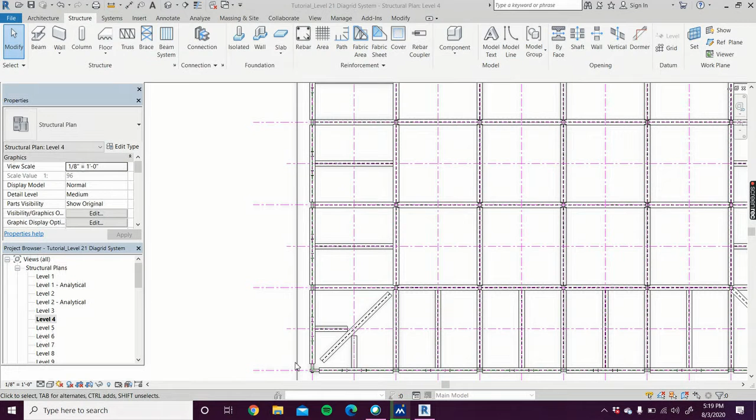We already have the pre-existing beams here like we did last time, so I'm just going to go ahead and start deleting all of these beams along the perimeter.

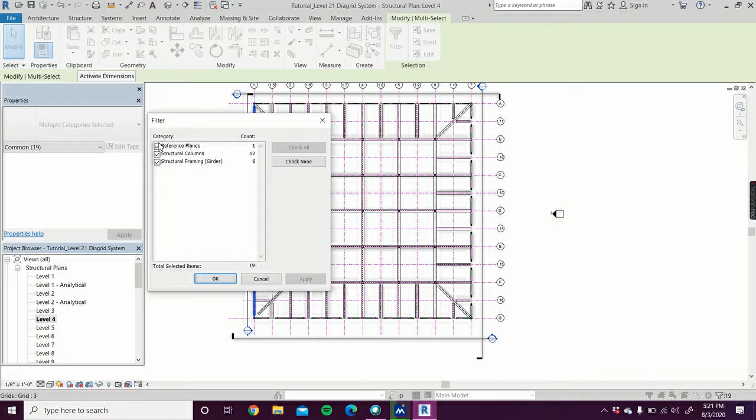Okay, they're all deleted. Now I'm going to start putting in the beams, 14 by 176, or whatever size you chose last time. We know that's going to be 2'6", and it's going to be 5 feet.

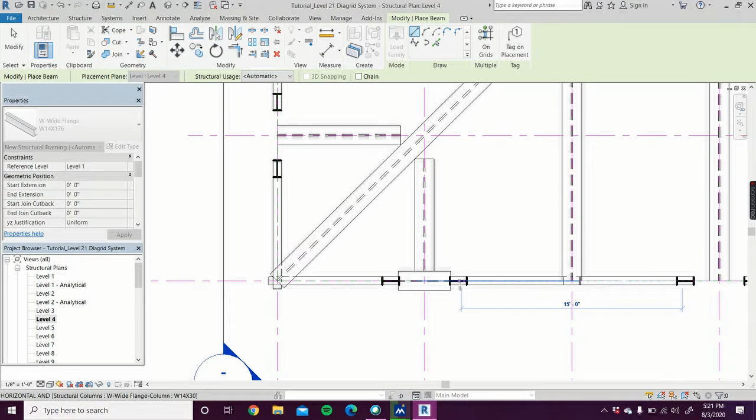That's going to be 15 feet. Shape that 2'6", 45 degrees.

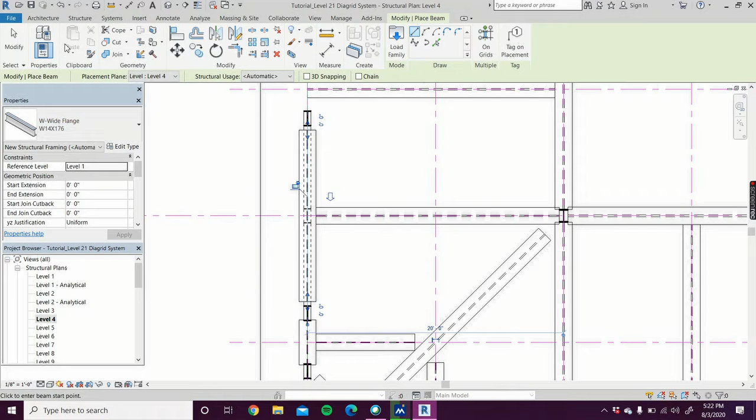Okay, and there we go, we have the first few done, so now what we can do is start making an array. While I'm at this corner, I'm just going to fix this beam.

Just to be clear, you may notice how these beams right here in the center don't connect yet. That's just because they're presentation for this floor plan. I don't really need to worry about that, but for you guys, you'll need to figure out how to make them triangularly connect to this middle beam right here, but again, that's up to the individual groups to figure out how to do. So I'll go ahead and start this array.

So tab, control, then the other beam, because I want to select them both in this array so I can do both beams at once.

I want to move it 20 feet. Let's see how 5 works. And yes, that looks good.

But now I just need to copy this beam over one more time for that edge. I'm just going to do copy because it's only one. Copy will work just the same way, you just don't have the repeat option. Choose anywhere, move it over 20 feet horizontally. There we go. Now we have that whole side done.

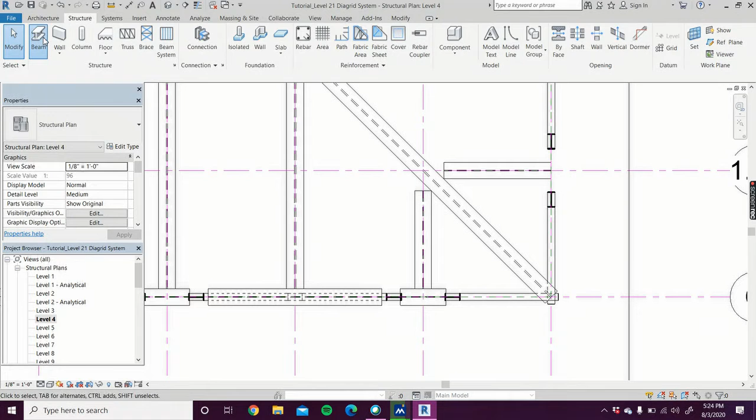I'll throw in this corner beam. Now let's fix the west side.

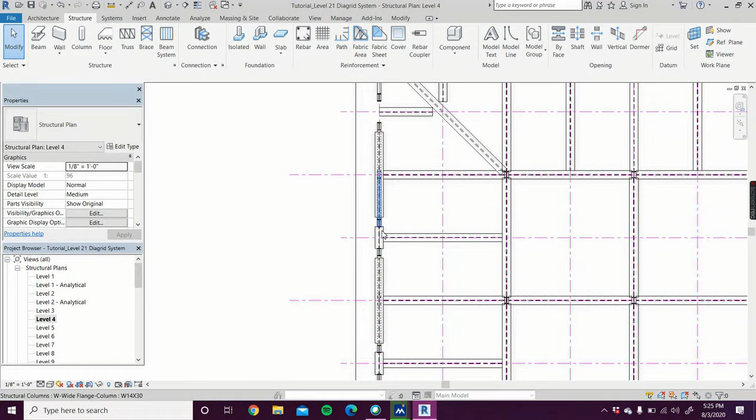Not sure if I remembered to mention these in the previous videos, but once you place all of these beams in each view, you should be ungrouping all of them. When you want to color the beams later on, they will all need to be ungrouped, and you're going to want to ungroup them now before you copy and paste.

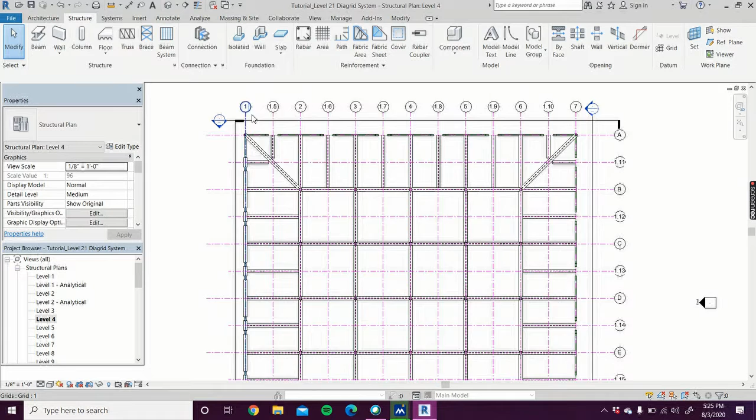Okay, I'm going to throw in this corner beam. Okay, and now I can mirror these.

I'm going to go ahead and ungroup these now. And I'm going to ungroup these too.

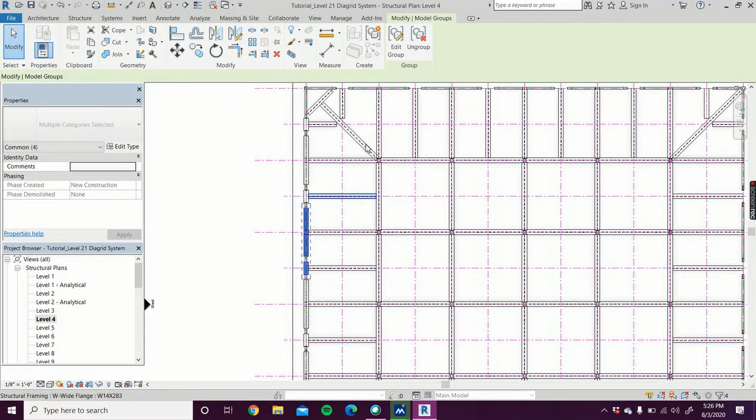Let's check. And yep, the only dotted boxes left now are just the temporary grid lines. So let's mirror these.

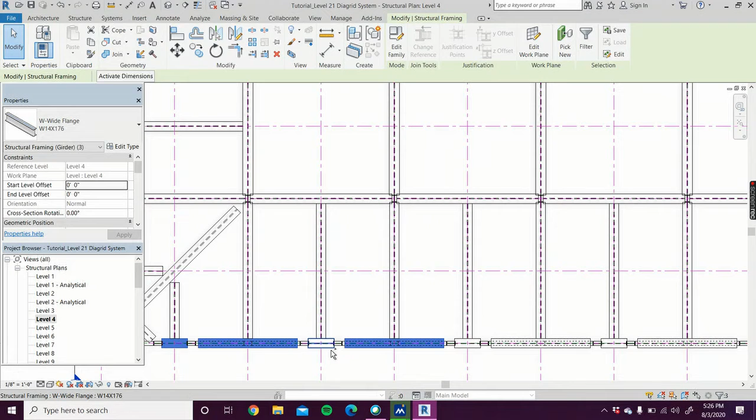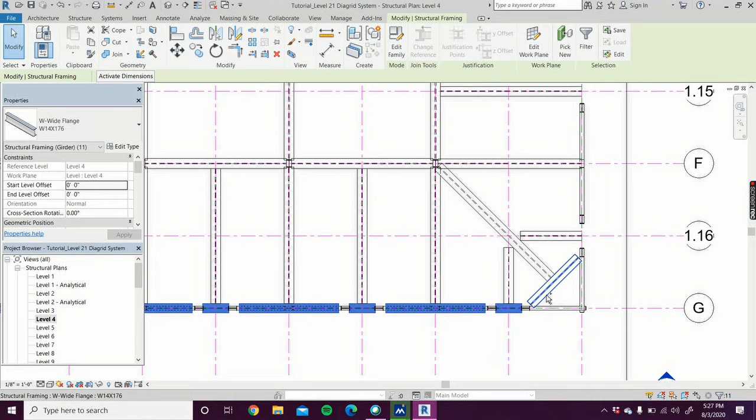I probably could have just selected all of these with the cursor by grouping them all, but just to show you how the control key works. It can be hard to select the right thing sometimes when you have them all at once. Now I am going to go ahead and click this diagonal beam too, because we know it's going to be going right there on the opposite corner.

So, mirror pick axis, grid line D, and there we go. Now it's all mirrored. Can bring this in.

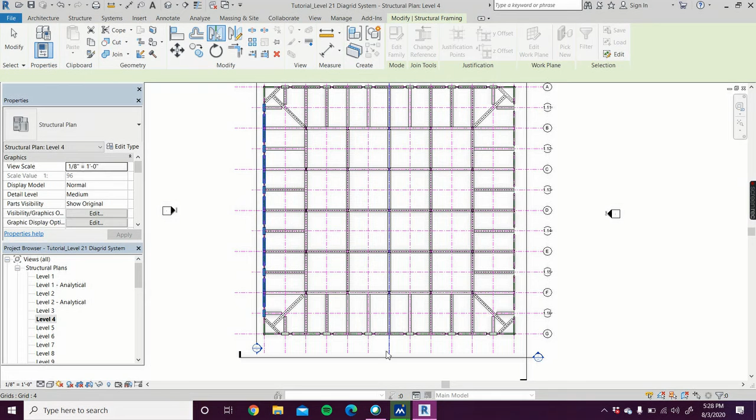Mirror pick axis, same thing, and there we go, that's the 4th floor.

Let's go check in the 3D view, and that looks good. Everything appears to be lined up, so that is how you finish the 4th floor.